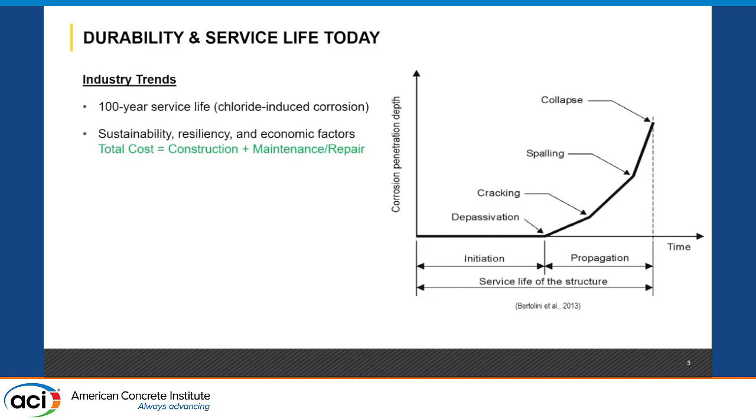Just by virtue of reducing the maintenance cost and repair down the road. And basically, when we say that it's going to last 100 years, we are talking about protecting it from chloride-induced corrosion. On the right is just a very simple chloride corrosion model of when initiation happens, when damage happens, cracking, propagation, and eventual collapse.

The challenge is that there's no real specific design guideline or specification on how to get to 100 years. This is where the wizardry comes in. Lack of standardization. In ACI, there are committees where we're trying to figure out this right now. So I highlight that one.

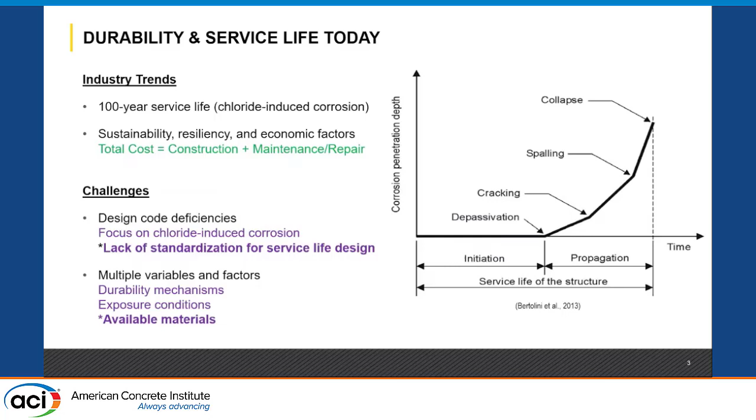We're also just, like I said, focusing on chlorides. And these are some of the other multiple variables and factors, namely availability of materials. A lot of sessions on new materials that are coming up and how they're changing for other reasons, but they also obviously affect durability. This is just a very brief overview of how corrosion works.

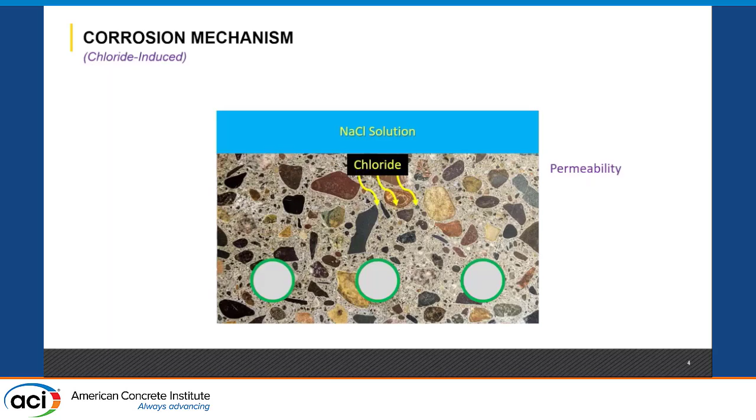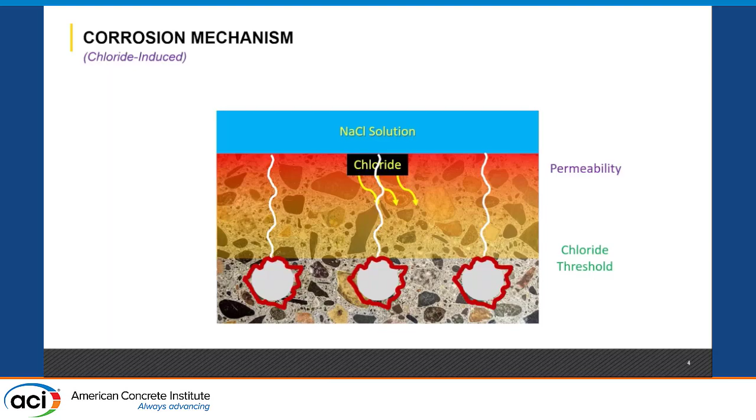You have an exposure to the sodium chloride solution, seawater, de-icing salts, and then your chlorides from that solution are penetrating into your concrete. The rate at which they ingress is based on your permeability. Eventually, you get enough of them in there, your steel reaches a threshold, a limit at which corrosion initiates. Rust products, which are expansive, create a pressure, inside pressure, create cracks, and so on. So we don't want that.

So what we do is we model the service life by using a couple of parameters, namely permeability, which quantifies the resistance to fluid penetration. These are a couple of the tests that we do. They're fairly short tests, 1 to 3 months. We also get another parameter, aging exponent, which is modeling how fast permeability is dropping. So permeability and how fast it drops.

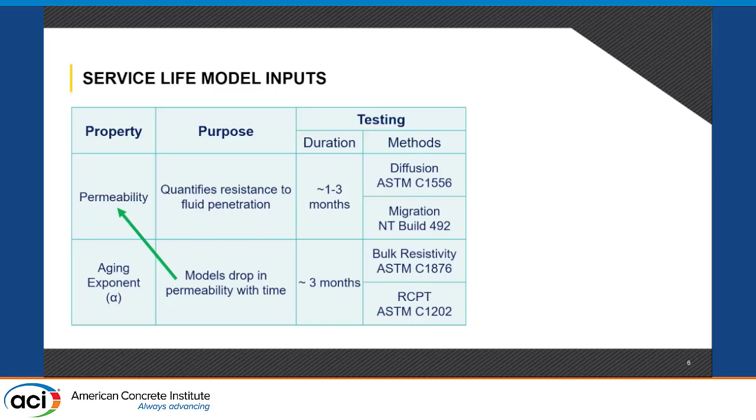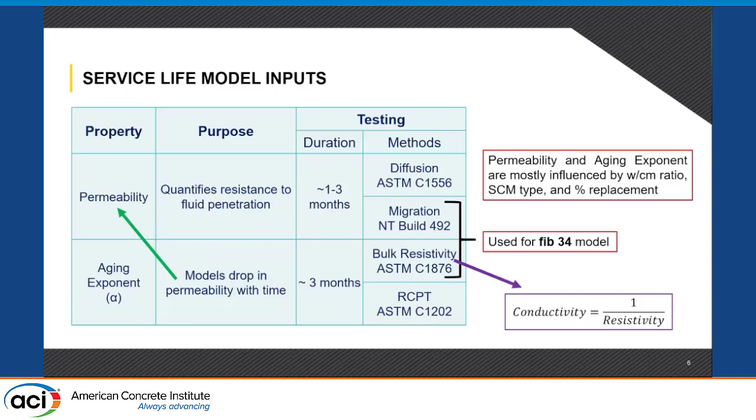These are some of the other tests that we do. These two parameters are mostly influenced by cementitious materials, water-cement ratio, and the percent replacement of those cementitious materials, like your fly ash or your slag. I'm going to be focusing on these two, migration—I'm going to say migration a million times—and resistivity. And as if you weren't confused before, I'm also going to talk about conductivity, which is the inverse of resistivity. But don't worry, I got some useful arrows for you to keep track of things.

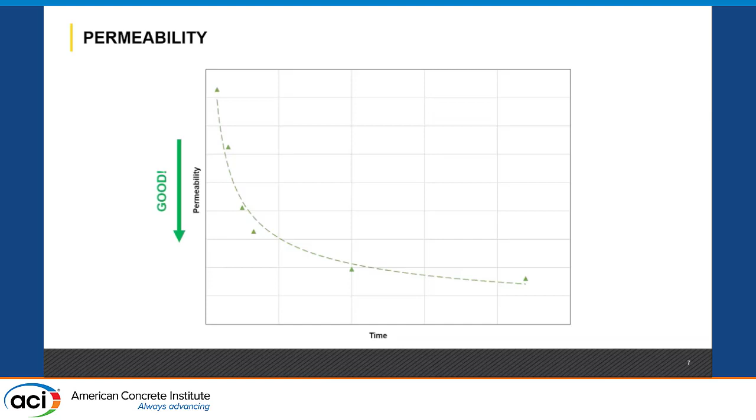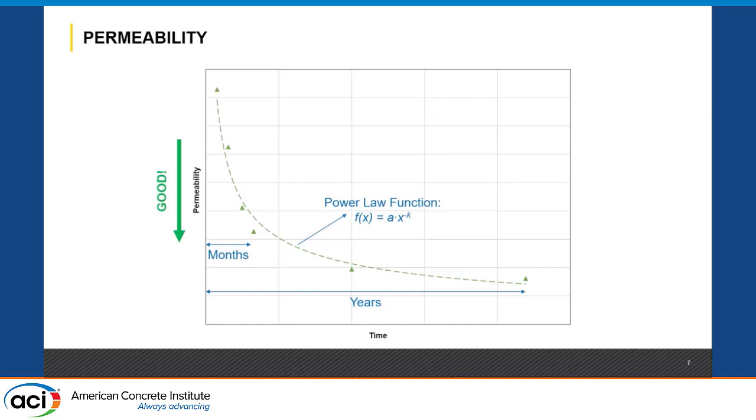So, because I'm going to be talking about permeability and conductivity and resistivity and all the ivities, I'm just going to put arrows showing down is good or up is good, so you can keep track of it. This is typically how permeability tracks with time for concrete as you develop strength, as the matrix hydrates and hydration products are forming, your permeability is going down with time. We're in the scale early on of months, eventually years, but in general, this relationship follows a power law function with an aging exponent right there, K.

I'm going to be referring to it as alpha a lot. We get to this relationship by doing a few tests at 28, 56, and 90 days, and then pretending that because I get to 90 days, I can predict 100 years, which is a stretch.

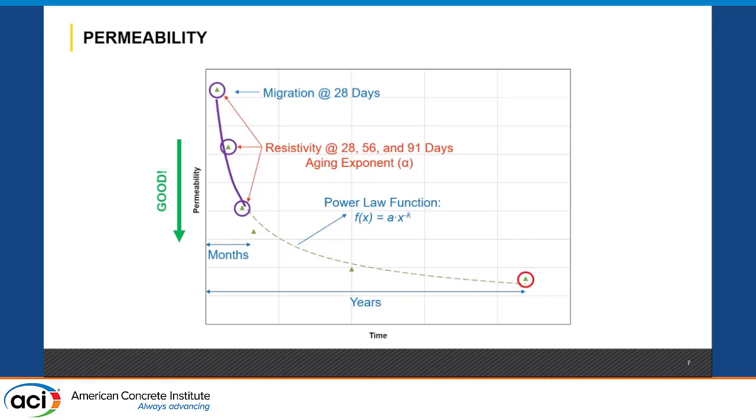This is basically showing you that I can get these 3 points, and then mathematically I'm going to get the rest of the line. I do migration at 28 days, and so on. This is what a default plot looks like for 3 materials: straight cement, fly ash, and slag. And again, good is down.

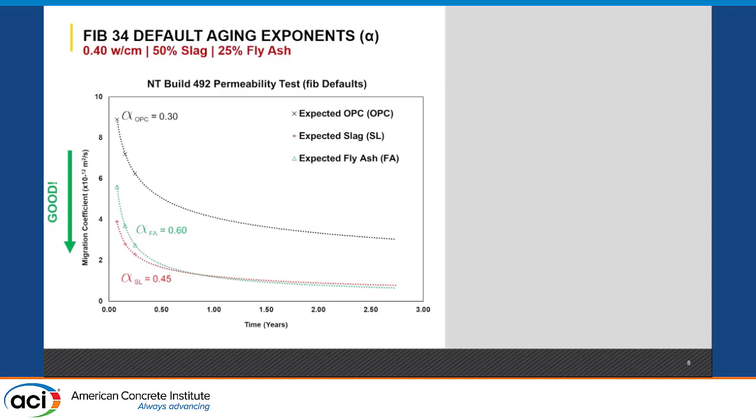You can see that green, the fly ash, is the one that goes the lowest. We see that these alpha values are between 0.3 and 0.6. The higher the alpha value, the more it's going to go down. It's an exponent, acts up really fast, but again it takes a couple of years to get to a more final section.

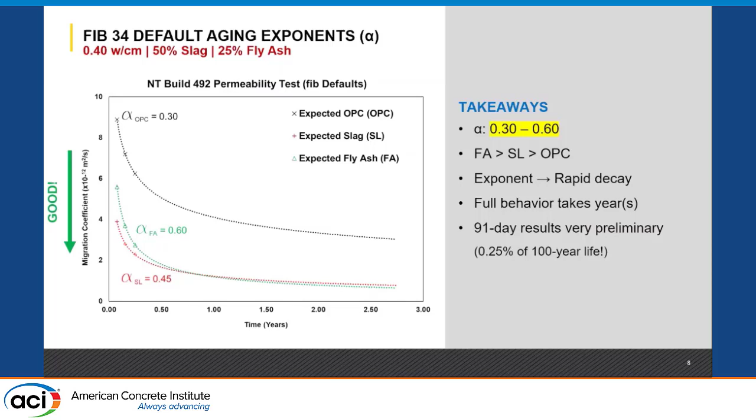We see that fly ash is more effective than slag, which is more effective than OPC. It's an exponent, there's a rapid decay. Takes years, but we really pretend that we know what we're talking about at 90 days, which is 0.25% of 100 years. So that was a little bit of background on permeability.

Hopefully you guys are the experts by now after that. I have data from a few case studies, 3 projects, three very real projects, 1 on the West Coast, 2 on the East Coast, dealing with fly ashes and slags, type 1, 2. Don't even touch 1Ls, again things are changing very rapidly.

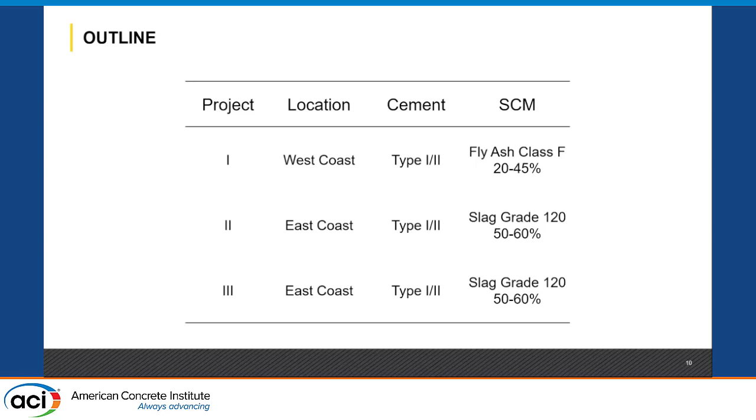A couple of notes: these are what I would consider mega projects. The scopes are in the billions, which means there's an extraordinary level of oversight and resources on these projects. The data is very recent, within the last 2 years, and this just gives you an idea of when we do these operations, we have half a dozen technicians, we have tents, we have curing boxes.

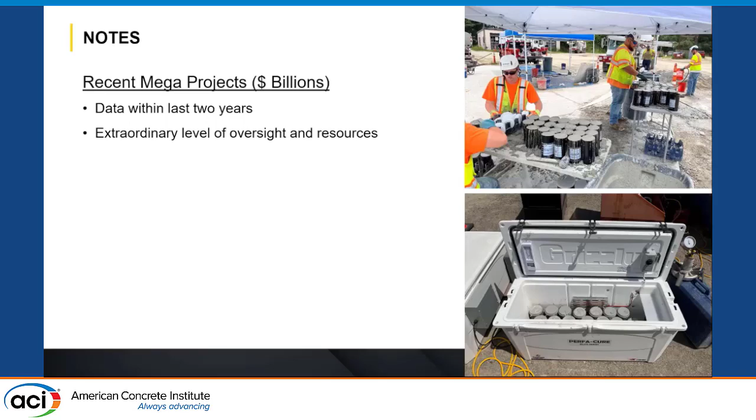We're doing the best that you can do in an industry, in a job setting. No one else outside of research can take this much care of cylinders when you have such big jobs. We have reputable labs involved that I've personally inspected. We have the proper sampling, the proper storage. We check for outliers in the data. When we get funny numbers, we send them to 2 different labs to validate them.

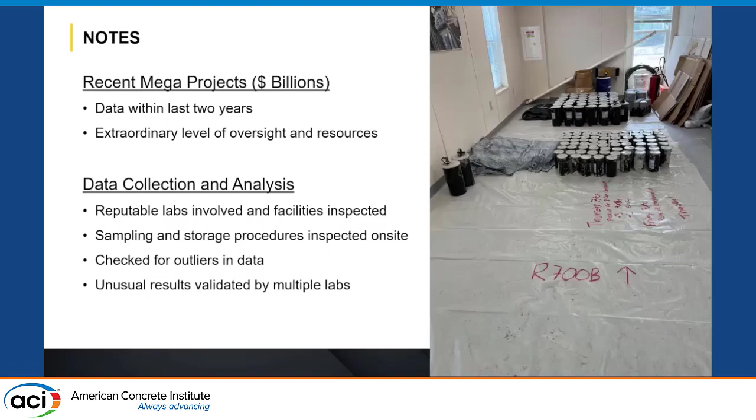This is what the test matrix typically looks like when we do these marine concrete mixes that need a 100-year service life. One mix can take 3 to 6 months to qualify. It's about 100 samples, beams, cubes, well, not really cubes, but cylinders and beams. It's about $50,000+ of testing.

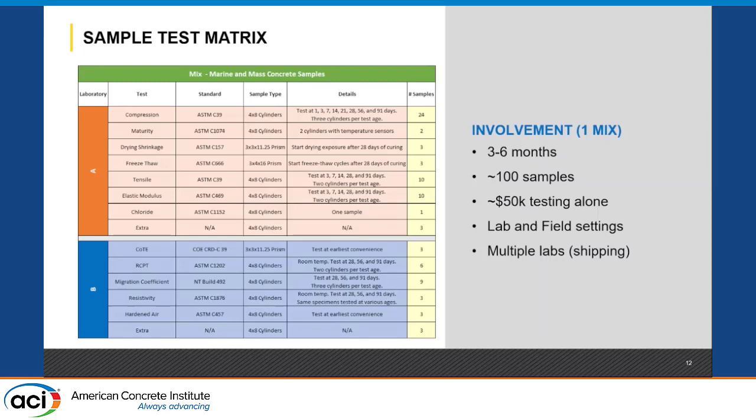There's lab and field settings. We have to use multiple labs, which involves shipping cylinders all over the country. Typically we use different labs because if you look at these tests, they're very high-end for industry: RCPT, migration, resistivity, hardened air. So not every lab in the country uses that. And we use the local lab for your mechanical properties, your strengths, your elastic modulus, your tensile stuff, the boring stuff.

So part 1 of the first cases I have is when things make sense. And when things make sense, they're still challenging, but at least they make sense. This is from the first project where we use fly ash, and we see some very, very key takeaways that are logical: the more fly ash you use, the higher your alpha value, 0.8 with 45%, 0.64 with 20%.

Awesome. We see that water cement ratio is affecting your early permeability. That's logical: high water cement ratio, high permeability, and so on. But we are getting high values of alpha. Previously I mentioned 0.3 to 0.6, and now we're getting 0.8. So that's way better than I thought.

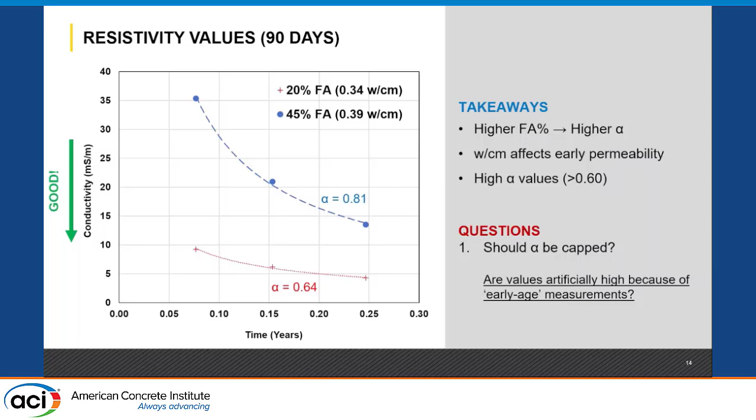So I figured the question comes up: should alpha be capped? Should we be conservative and say this concrete's not this turbo, it's a little slower? Maybe, I thought, okay, 90 days is very early, what if we run these samples to a year? Because this is such a mega project and I can spend money left and right on testing, I was able to do testing up to a year, which is very rare in any construction project.

So I actually ran them for a year and I got a higher alpha value. So maybe alpha shouldn't be capped at 0.6. Maybe we can go to 0.8, 1.1.

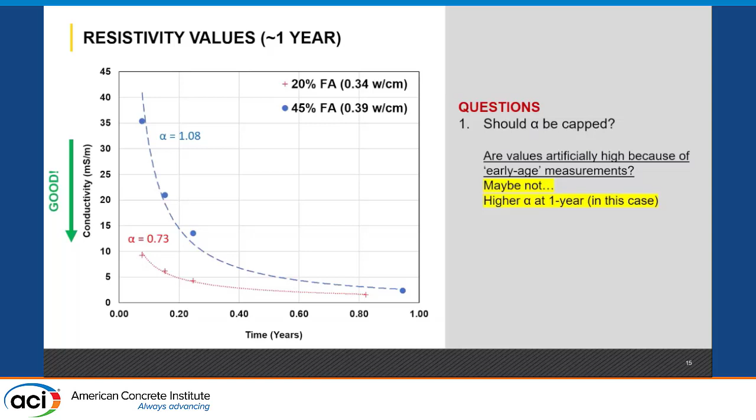Another question came up: when should alpha be determined? Because 90 days gives me a different number from 1 year. So here's what happens. The green line is my permeability if I just think 90 days is correct. The blue is what I measured and it got better. And the orange is what I measured and it flattened.

You can see there's a huge discrepancy on what my alpha can be. So I'm calling this Schrödinger's aging coefficient. If I don't measure it, I don't know. If I measure it, it could be better or worse, I don't know.

At 1 year, I did a bunch of retesting and found great correlation that was not present in 90 days. If there are any researchers here, you know that when you get 2 decimals of similarity, you right away think that can't be right. And I ran the numbers like 10 times, and they were right.

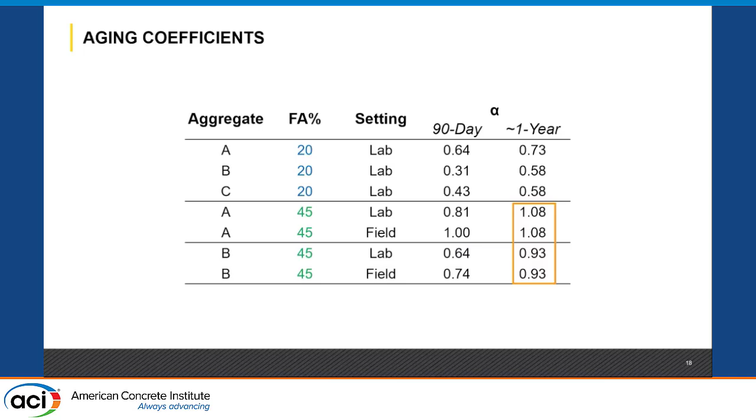And they were right for 2 other sets of mixes. So this shows that at 1 year, this fly ash was super consistent. This is mock-ups in the field and in the lab halfway across the country. It was remarkable to match these results, and I checked that it was not the same set of data. So again, this is saying fly ash is great, and if you measure it for a year, you have really consistent, reliable data.

So you may have noticed I'm going to bring up more questions and answers throughout the presentation. This is from part 1. Part 2 is what happens when things stop making sense. This is from the second project, which involved slag.

2 years ago, I started doing lab trials with these mixes. We did production trials, we did mock-ups, we started doing placement. And right away, we knew that with the slag, the resistivity was just awful. These lines are super flat by mathematical standards, giving me god-awful alphas. I was talking about 0.3 to 0.6. I started with 0.11, and I barely got to 0.3.

So this was behaving like an OPC, seemingly. And I also found that 90 days was about the same as 9 months, so it was not a time issue. At the time, these were unremarkable, but good enough numbers because the service life model worked. So I didn't like them, but it was good enough, so we moved on.

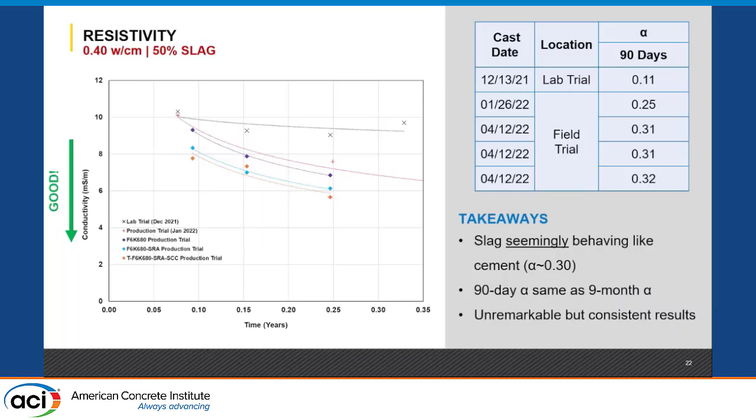And the problems arose when we moved on to construction. We had this baseline during lab trials and production trials of resistivity, and we had a QC limit that for our durability to be there, we should not be below this limit. We did mock-ups months later, and mock-ups were better. That's awesome, no problems. And then the second we went into construction, we dipped below the non-conformity level.

So that raised all sorts of flags, and people started getting worried, and I got calls about what the heck, how do I explain that? And I started digging into it little by little. By the time we were able to get more information, things got better magically. And then the project wanted to move on, didn't care.

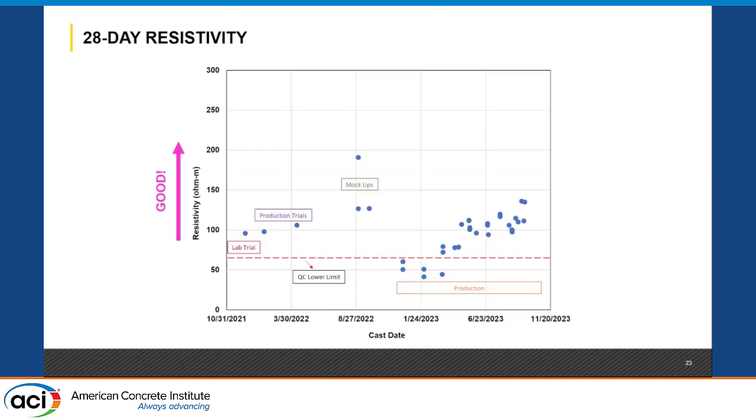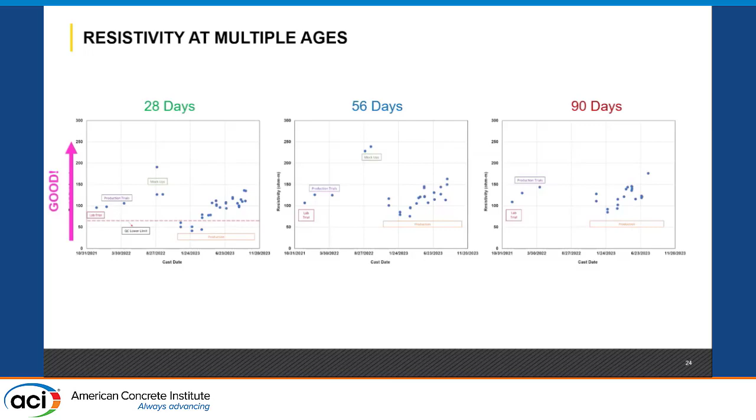I didn't get to do my science fair experiment, but that's basically what was the inception of this presentation: what the heck is this, how do we explain this? I can't. We saw that the trend for resistivity matched at 28, at 56, and 90 days. So we know for sure that something was going on with this concrete that made it have low resistivity consistently.

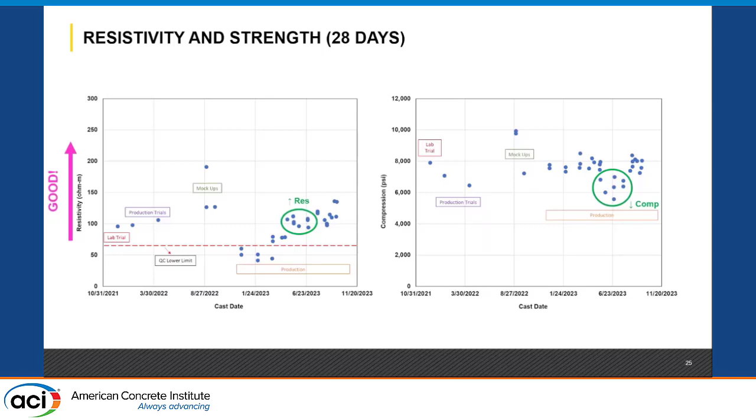We compared it with strength. In broad terms, durability is not the same as strength, but good durability should also come with good strength. We saw that sometimes low compressive breaks have good resistivities, so that was not even matching. There may be some drops in strength because of seasonal effects, water demand in the hotter months, and so on. But in any case, there was no real correlation with strength. That was the key aspect. We also see that strengths did not show the big dip that we saw in resistivity.

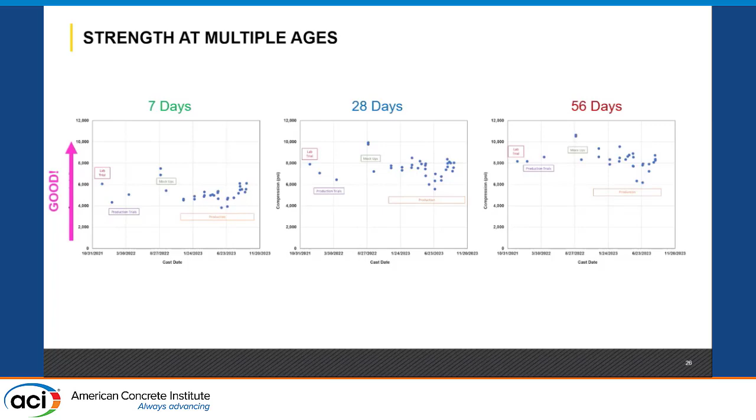We never had non-compliant strength. Strength wasn't an issue, it was just the resistivity.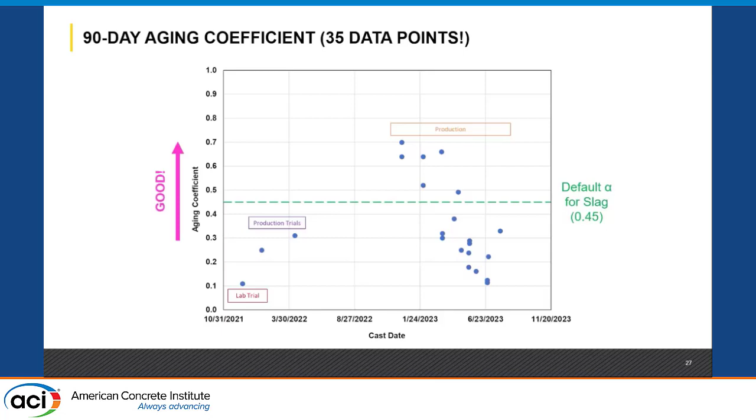So questions are, what caused resistivity to fluctuate, and is resistivity accurately measuring permeability for these slag mixes? So with this in mind, we had to do something new, so we had some new ideas.

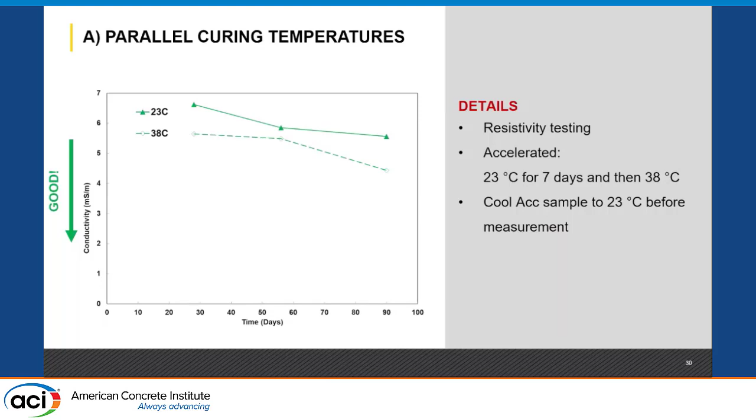The first one is, what if we just do a bunch of different measurements at different temperatures, if we accelerate it? So we put resistivity samples at 23 for 7 days, and then at 38C, and we found that we were basically trying to predict the future. So maybe you can get 150-day results in 90 days and so on.

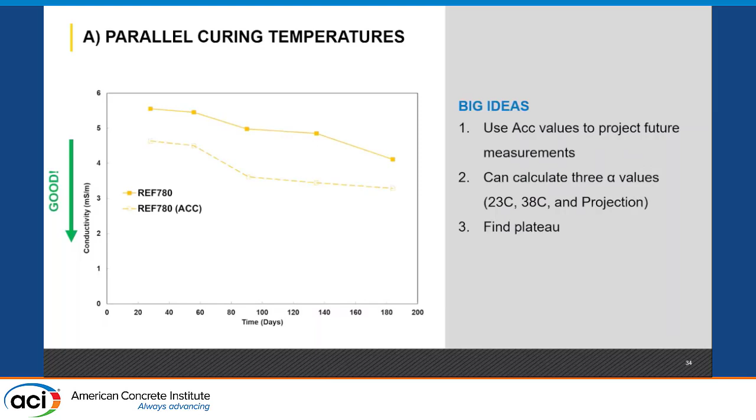And you can also get a bunch of new alphas because you have new lines. And you can find when the pozzolanic reaction from the slag flattens. In general, that was promising, but we still had these low alpha values, and there was a lot of variability. I'm just showing you the plots that look kind of nice.

The other idea was that we were just going to do a bunch of different testing, migration, resistivity, and RCPT, and compare three different types of alphas with these. We found a big disconnect between migration and resistivity.

You see these are two axes on the left, conductivity on the right, migration. And because they're measuring permeability, they should be sort of on the same line or showing the same trend, but yet they don't. We have this huge discrepancy where migration is actually showing that OPC is pozzolanic. That's this big drop right here.

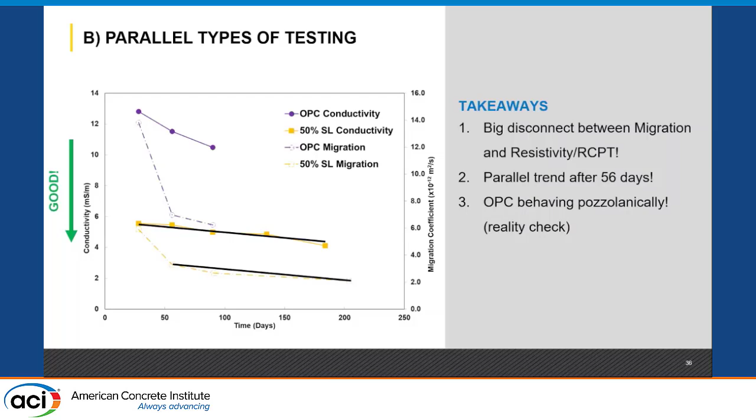So big discrepancy there. Something interesting, we see that there's a parallel trend between migration and resistivity, but it takes 56 days. So something about resistivity didn't capture this drop. And just a reality check, why is OPC behaving pozzolanically?

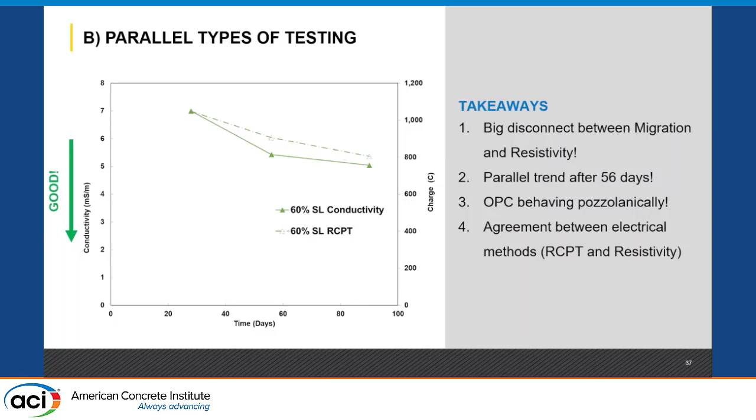We do see, the fourth takeaway is that there is agreement between conductivity and RCPT, which are both electrical methods. So that kind of hints at something going on with electrical methods. And in general, we see a wide variation between alphas, aging coefficients, and which test you do.

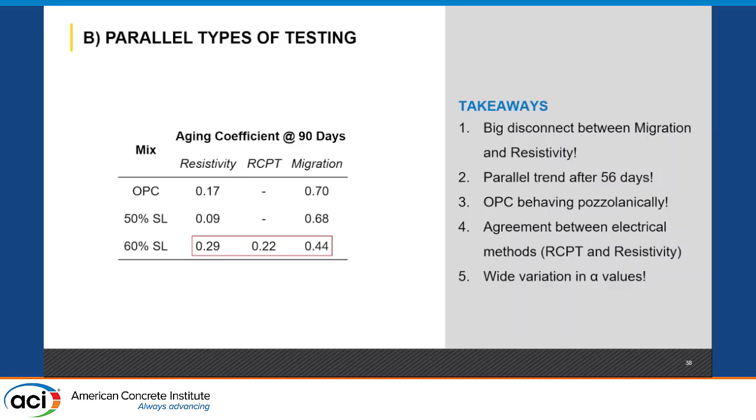So part three questions are, how do you assess variable performance with different tests? How should aging coefficients be determined, and what should the QC criteria be?

So in summary, I have actual just questions. Should alpha be capped? I'll mention that Life 365 capped at a 0.6, but we saw that maybe these are from older materials, so we can do better. When should alpha be determined? FIB says 2 years. What caused these values to fluctuate?

I don't know for sure, but I think it's a change in the slag. The ASTM specs for cementitious materials don't focus on durability, they focus on strength. I think there's a compatibility issue between testing and materials, namely with electrical methods and the slag.

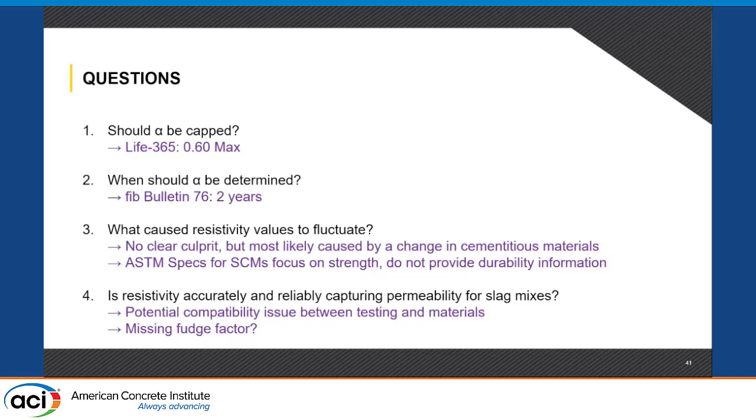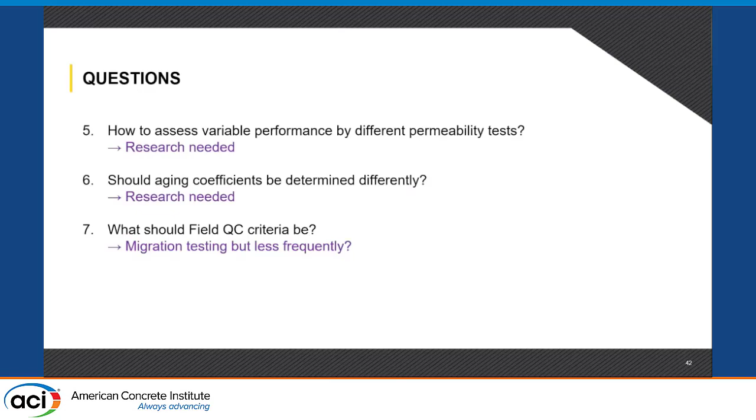Research needed to address different performance, research needed for how to really measure aging coefficient, and what should the field QC criteria be. I think maybe we should drop resistivity, focus on migration, and do it less frequently.

References, and then questions. Happy to take questions, but also answers from you guys, because I don't know this. Experts in the field don't know it either, so we could use new ideas. Thank you.